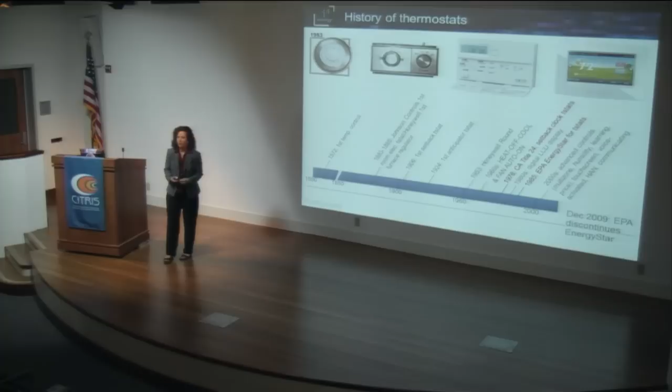So a lot has changed, and I think one of the things we've been very interested in is seeing how this affects energy. About 3 years ago, the EPA discontinued the Energy Star label for thermostats. This was based on research they did, looking at a number of different studies over the past decade to see if these thermostats actually save energy. So I'll show you some of the findings.

They found that programmable thermostats were pretty much being used like manual thermostats were. So if you gave a programmable thermostat to someone who already set back their thermostat manually, well, they were going to program it and use it to do the same thing. But it wasn't magic - it didn't change behavior, and the behavior really was what was driving the setbacks.

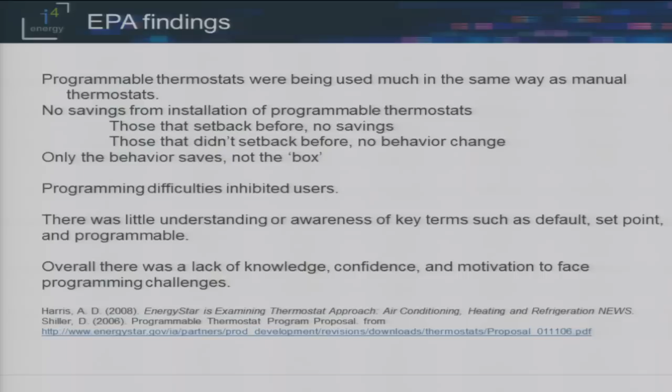They also noted a number of things that had to do with usability - a number of problems with programming. It not only inhibited users so they couldn't program, but they didn't want to program. It wasn't engaging enough to them to even want to interact with it. There's a lot of terms like set point and programmable that people just didn't understand. It wasn't an intuitive use of the word. Overall, you can see people just weren't using it, and they felt it wasn't behavioral reasons - it had to do with the usability of the device itself.

And so that's where Alan Meier came in. He got a grant from the Department of Energy to do a bunch of research in this area. So we started off with a literature review, and we did basically a number of different investigations.

We teamed up with a weatherization crew in the Midwest so that when they went in and actually installed a thermostat, we asked them to take a picture of the thermostat that was there already and to administer a short survey.

Marco Pritoni did this wonderful work with Amazon Mechanical Turk. This was a survey and photo upload - we actually paid people pennies to upload a picture of their thermostat, which was wonderful. We could start looking at cases where people would say, oh yes, I programmed my thermostat, and we would look at the photo and it said it was in hold mode, which basically turns it into a manual thermostat.

This was very informative, and he's got a paper, I think it will be published in the next few months - I think it's in Energy, the journal. We did a traditional online survey, thanks to the Center for the Built Environment across campus. And then we conducted this usability test. Now, Alan Meier talked about this about a year ago in this seminar, so I'm basically going to summarize for you what happened in one slide and then tell you about the work that went on beyond that.

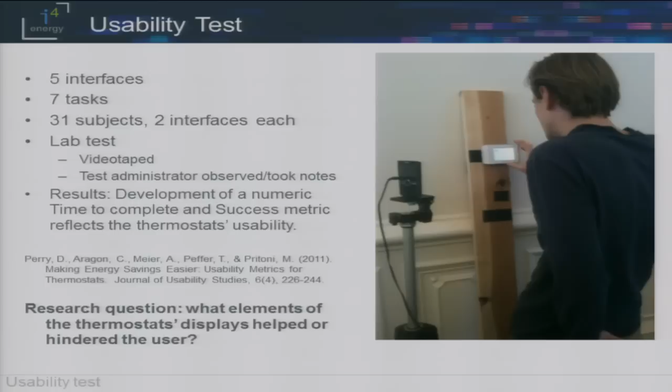So it combined how long it took someone to complete a task with whether they were successful, whether they actually accomplished what the task set out to do. And we were able to use this to reflect the thermostat's usability. A ranking of 0.9 meant it was really usable, and lower rankings meant the thermostat was not as usable.

Daniel wrote a nice paper about this, about a year ago in the Journal of Usability Studies. But my question was, what about these thermostats either helped the usability or hindered it? What helped people perform these tasks, or what prevented them from performing the tasks? So that's really what I'm going to focus on for the next few minutes.

Now this is my caveat. Even though I'm going to be talking about usability, I want to show that usability isn't the whole story with respect to whether people are going to use these programmable thermostats. I think the case of cell phones shows this as well. You could get a cell phone that's not very usable, but because of the utility of it, people want to use their cell phone.

It's going to overcome any barriers to usability. So there's that factor. If people see a high utility, that's going to overcome any problems with usability. Another issue is social acceptability, too.

I think about the Nest thermostat and the people that purchase those. Consumer Reports didn't list them as high in terms of the rankings for usability. But I'm going to bet that if someone goes out and spends the $300 on a Nest thermostat, they're certainly going to use that as a bragging point. It's a beautiful thermostat, something you're going to be proud of on your wall, and you're going to learn how to use it if you see any problems with it. So you have to think about other factors other than usability.

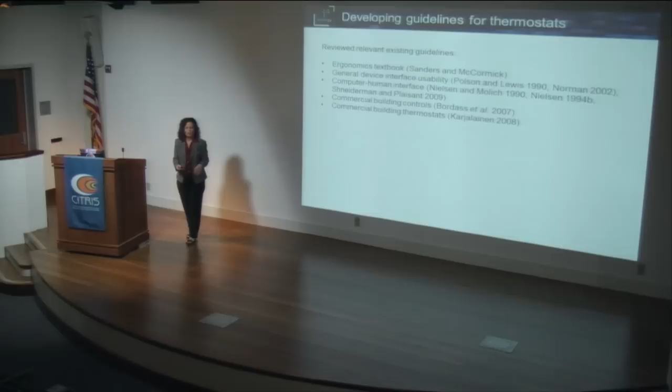Now I'm going to focus on usability. One of the things I started with was looking at what guidelines are out there specifically for programmable thermostats, but also zooming out a little bit and seeing what other guidelines I could use to help guide this analysis.

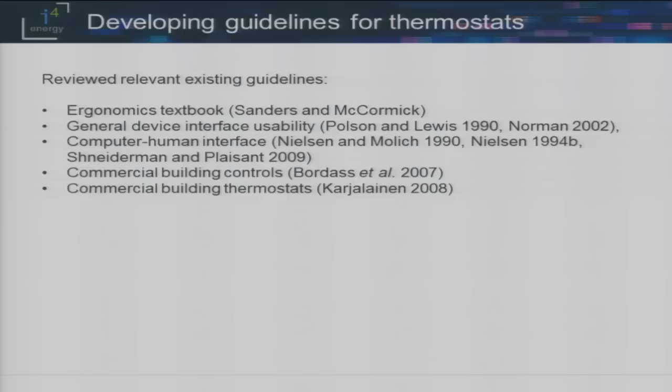So I picked up an ergonomics textbook and just looked at it. It talks about font size and contrast and things like that, dexterity. I looked at general device interface usability, Norman's work—maybe you've heard of him, Donald Norman—computer-human interfaces. Thermostats are really like an embedded device these days; it's really a dedicated computer anymore.

So that was useful to look at. Commercial building controls is another area I looked at, as well as a PhD student in Finland who had done his dissertation on commercial building thermostats and usability of these. That was very useful. You don't have to read through all these, but there was quite a bit of overlap, so one of the things I did was first go through all these different guidelines.

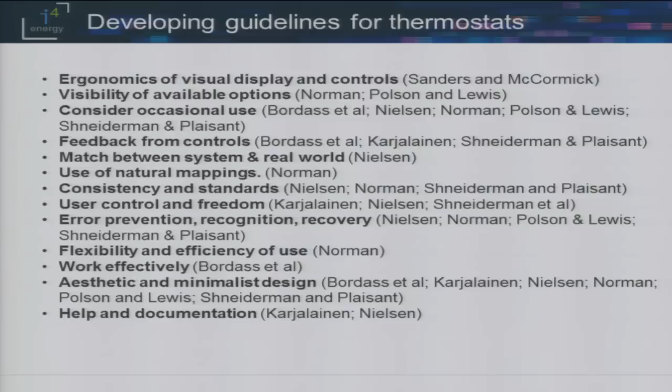I saw where they overlap, like the visibility of available options. Both Norman and Polson and Lewis talk about feedback from controls, match between system and real world, or consistency and standards, error prevention, recovery, aesthetics. Many of them mention minimalist design, and then help and documentation.

Now I'm going to go through the different thermostats. There were five interfaces, and we looked at a pretty broad spectrum, I think, ranging from the simplest one, a simple button thermostat, probably fairly inexpensive, all the way up to a computer web interface.

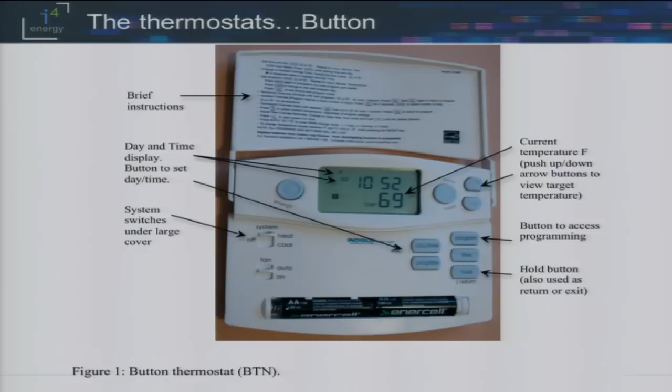With respect to the simplest model here, we called it the button thermostat because you can see this cover here—it comes down and hides this set of buttons. These are the buttons available all the time for the user to look at. So you can see some features you don't use as much, like programming, are kind of hidden away. If you want to just change the temperature, you can do that up here. It also has the instructions there.

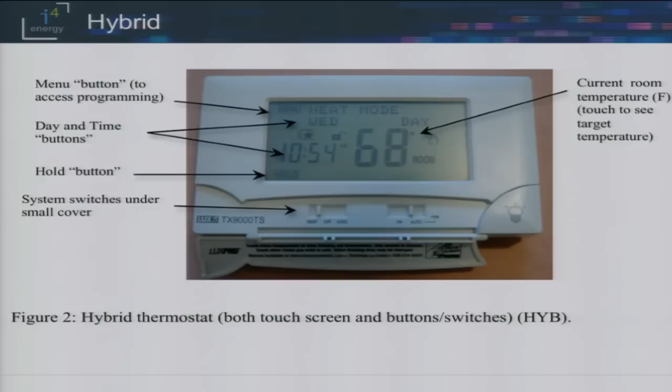This is the next thermostat we use. We call this a hybrid because it had both a touch screen and buttons and switches. In a sense, this might have seemed like a good idea at the time, but in retrospect, people seemed very confused by this. If they saw buttons, they didn't think you could actually touch the screen, or vice versa. So it's like, if you can touch the screen, then why would you have buttons? It led to more confusion than perhaps it was worth.

It also doesn't really look like a touch screen. The size of the screen is just a little bit larger, and I don't think the buttons here obviously jump out at me as something you could push. Actually, this temperature number here, you can actually push that, but it's not obvious that that's an actual button.

You would toggle back between the current temperature and the set point temperature using that. This is a full touchscreen thermostat, Honeywell.

It has actual, I call these switches, kind of virtual switches here in terms of turning on and off the fan or the heat. And then it has a set of buttons here that leads you to other screens that you can scroll through to get other features.

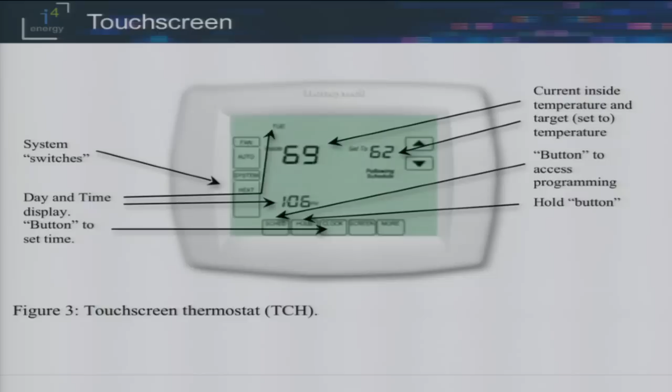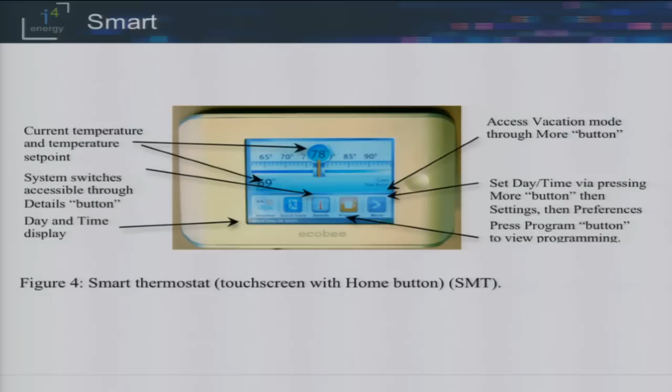Next is an Ecobee. We call this our smart thermostat. It was a connected thermostat, so it actually had a web interface, which is what I'm going to discuss next. This was probably, even though it was a device on the wall, similar to a computer in that these were kind of menu-driven. You pressed a button and you got another. It felt like you were looking at a menu, and it had that kind of look and feel to it.

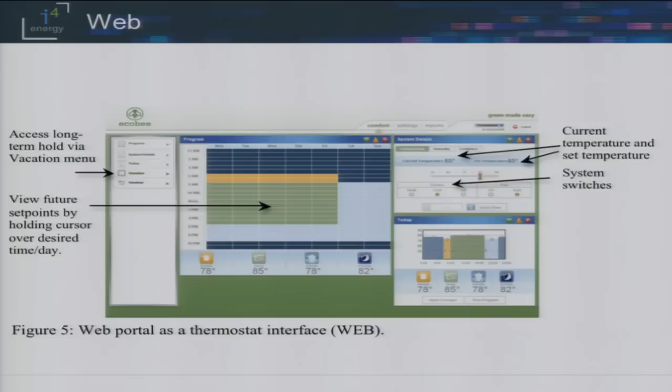This was the web interface for the Ecobee. You can see right off the bat, it has this tabular display that shows the different temperatures based on the time of day and the days of the week. So this is the home screen. You can see your switches there and the current and set point temperatures there.

Now there's a bunch of these graphs, and I'm going to walk you through these a little bit. Basically this shows three things. I'm showing the task, and we thought this was the simplest one. This was basically go up to the thermostat and set it to heat. Don't do anything, just set it to heat. You don't have to set it to any temperature, just turn it on. At the top here shows the percent success.

So there's about 13 people or so per thermostat, and it shows 100% of the people with the web thermostat were able to complete this task. Across this side it has the time, showing how long it took them to do it. I'm showing the completed tasks as well as the incomplete tasks.

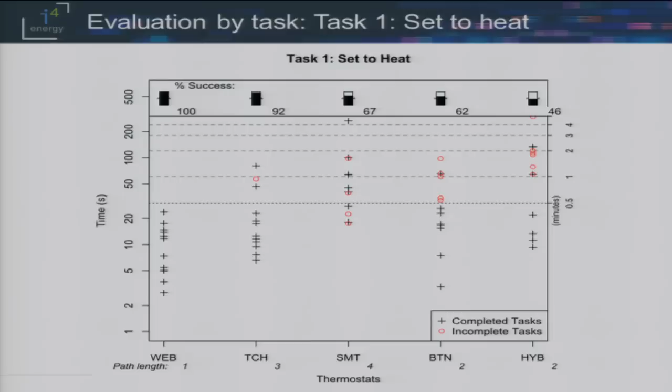Now incomplete task basically means either the person says 'I gave up, I don't know what to do, I'm done,' or they actually did it wrong—they did something and thought they were done, but they actually didn't complete the task. So it includes both of those. You can see there's quite a range here. Of the hybrid thermostat, half of them couldn't even turn it on to heat. So you can see usability is kind of an issue with respect to the simplest, probably one of the cheapest models out there.

Some of the reasons, this is what I was trying to get at: the two with the highest success had the switch—heat, cool, off—visible at the home screen or default level. If you look at the lowest success, the switch was hidden under a cover, and there were actually several people that never figured out there was a cover there. There was no affordance on it, no little arrow or anything that suggested it was a cover.

One thing I forgot to mention here is what I'm calling path length. I don't know if you can see this way down at the bottom, but the idea is how many steps did it take to do the task—whether it was lift up the cover, switch it, so that's 2. You can see the path length here wasn't very long, but the fact that the first step was really difficult was a problem.

So there's 31 people. Each person tested 2 interfaces.

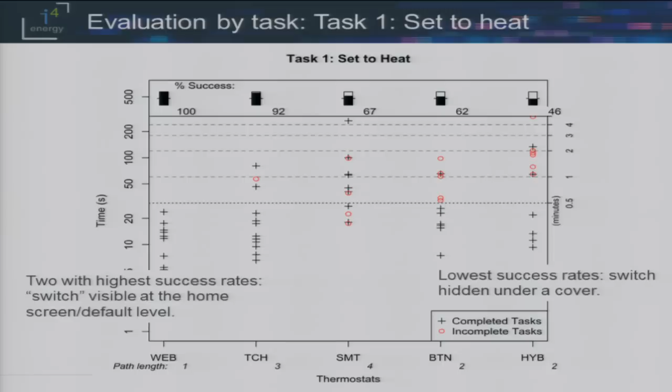You can see that path length was longer here, but still more than half managed to do it. So it was useful to look at all of these things.

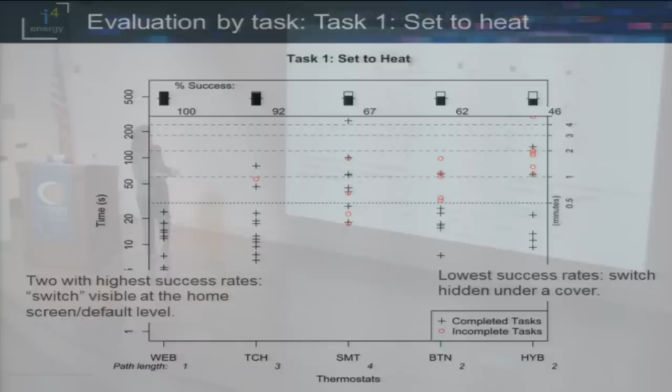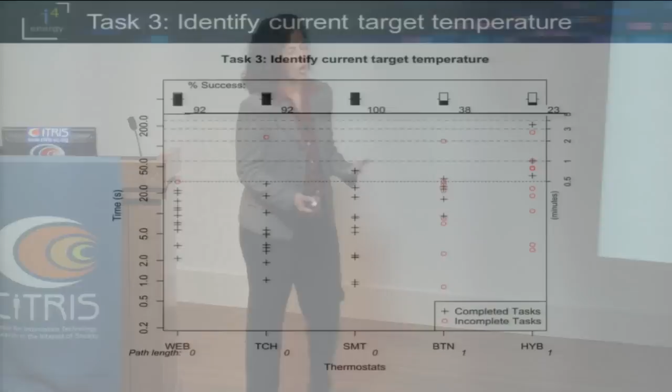Okay, the next task was to identify the current target temperature. So what's the set point right now, right? Not the room temperature, but the set point.

You can see there were basically three thermostats that had both temperatures displayed, so then you got at least a 50-50 chance of guessing which one it is, right? And actually these were labeled, so that even helped more. But some people aren't familiar with the term 'set to' - what does that mean? So you see pretty high success rates with these three.

Yeah, so it showed both temperatures, and the other two didn't have both shown. So with the button thermostat, you had to press up and down on the arrows to actually see what the set point temperature is.

And with the hybrid, you had to press the screen where the current temperature is, and it would toggle to see the set point temperature. Completely non-obvious, so just a few people got that. You can see how long this one person took - over 3.5 minutes to figure that out.

Do you have an audio recording, and were there things that you had to bleep out?

Yeah, actually, yes. The researcher, Daniel Perry, who recorded all this, did an incredible analysis where he went through every single video and tallied what people did and their comments as well. He had like a little column - it wasn't the expletive column, but it was something similar. When people expressed frustration, he actually counted that.

Pretty neat. These people did the tasks in sequence? They did. So at some point, they probably figured out how to open the cover - some people did and some people did not, for all seven tasks. So there was some kind of learning as you go through, but not in all cases.

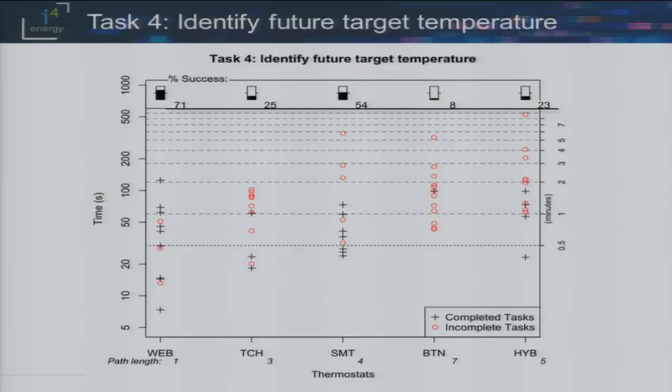As I mentioned, the web had the schedule right on the home screen. You had to mouse over it, and then the temperature number would pop up, and you could see what it was. But it was right there on the home screen, so I think that's why we got a pretty good success rate.

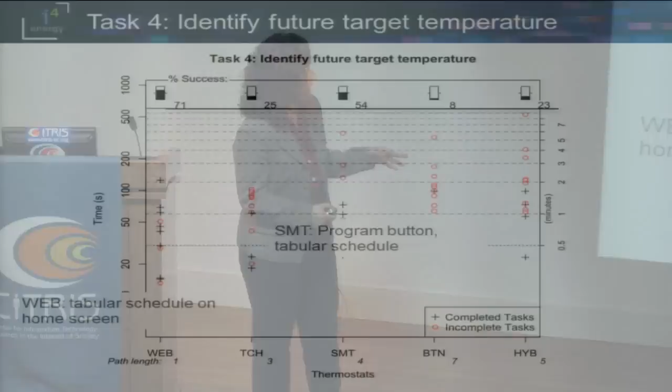The smart thermostat had a program button and a tabular schedule, so that was good. I think it's much easier to read when you have time of day and days of the week in a graphic format.

The touchscreen, it was called a Schedule button. And I've seen on different thermostats, it'll say 'prog' for program. So part of it, too, is the nomenclature - people may not be familiar with these terms and may not understand what term gets them to where they want to be.

And the hybrid thermostat, if you press on menu and then scroll, and then you could select it, and then next - so it was, again, a series of operations to get this. You had to actually go through each mode to find out the day and the time that you wanted.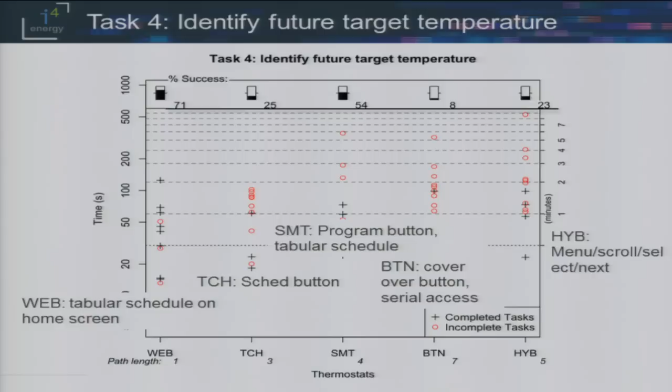And the button was - one person got it after 1.5 minutes. They probably have one of these at home or something. It was serial access, so you had to go through, again, every single time. At least the hybrid allowed you to skip a day, but this one, you had to go through every single one - it was serial access to it.

And again, the cover was over the button, so if you didn't get that the button was under there, you were lost already.

Okay, the final task was to set it for away or vacation. You can imagine with a programmable thermostat, one of the energy saving features would be to turn it off when you're gone, right? To basically turn it down. And you can see the success rates here.

Three of them had a specific button that said vacation, away, or energy savings, in addition to a hold mode. There were a few different ways people could accomplish this task: they could go to a specific strategy like vacation mode or away mode, or they could just put the thermostat in hold.

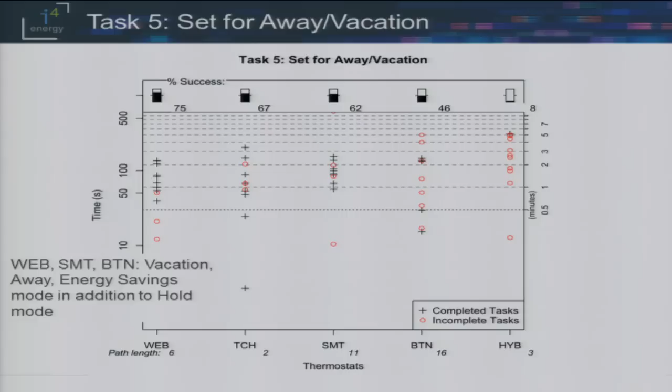Some people got so frustrated, that's why you see times of 5 minutes up here. Look at that guy, 10 minutes trying to figure this out and unsuccessful. People would go through and actually program for every single time of day and every day of the week. A couple people did that as their strategy.

So you can imagine if you're walking out the door on a vacation, with all the things you've got going on, you're not going to go over to your thermostat and try to figure out how to put it in vacation mode, right?

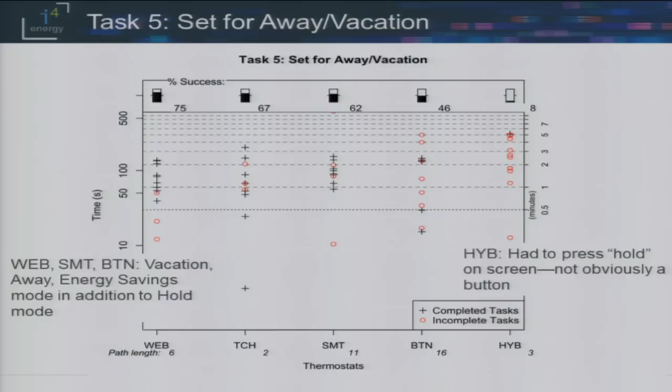In the hybrid, you had to actually press hold on the screen. I don't think it's obviously a button. One person got it after 5 minutes, probably random too. You should see these videos, they're incredible. People are just touching it and doing anything they can to try to get it to respond.

Things that seemed to be important were visibility of available options, consistency in standards, and feedback - those were kind of the three main things. One of the things I looked at too, from the existing guidelines, we pulled these out as some of the more important ones. Terminology was also a big thing.

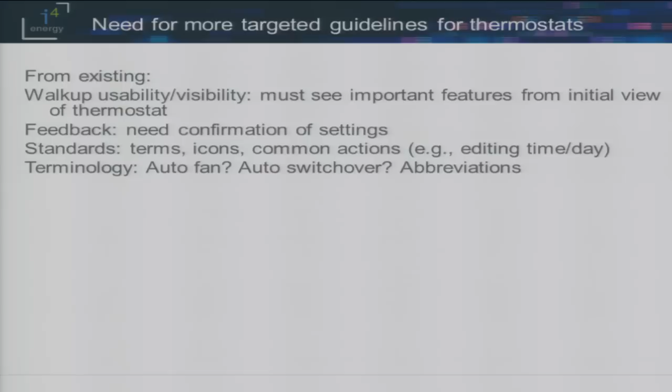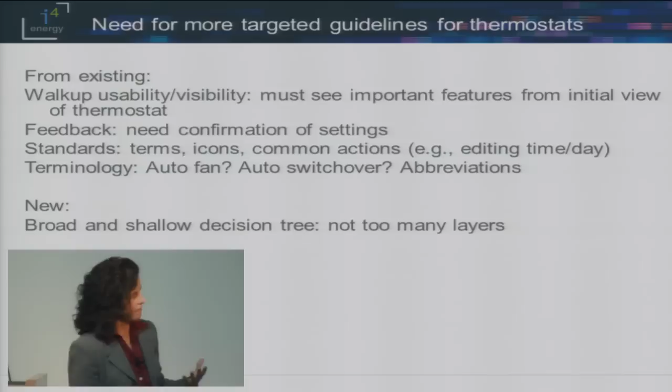But it also seemed to me that there were some guidelines that were missing. I mean, obviously I didn't look at every single guideline there is, but I did try to cover the bases. So one of the things I thought would be good, if I'm creating a new set of guidelines for programmable thermostats, is having a broad and shallow decision tree.

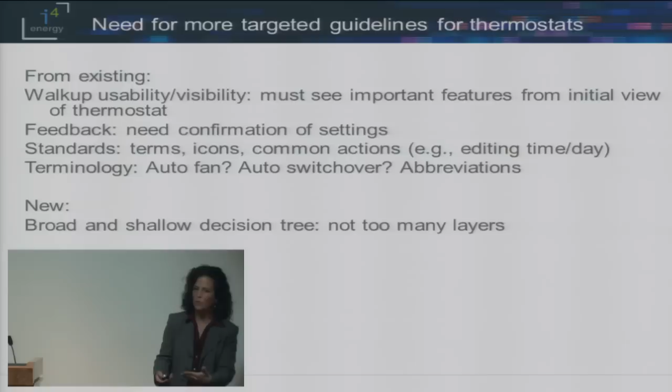The idea here is that you have most of your choices at the home screen, very visible, and you don't go too deep. You don't have 10 layers, because at every decision point is a place where people can get lost. So the idea is to try to build this decision tree as broad and as shallow as you can, so that people don't get lost, and you can increase your chances that they'll actually accomplish the task.

This is not new - I went back and actually found a reference to this under Shneiderman. In 1988, he came up with this idea or something very similar.

Hierarchy of display. Often with these thermostats, you see the display for the set temperature and the current temperature neck and neck, the same size, where actually you would probably look at the current temperature more often. So it's nice to have more of a hierarchy so that the important features really jump out at you, and the other ones kind of fade away in the background.

Affordances - switches should look like switches, covers should look like covers. There should be some affordance or marking on there that shows that you should push this or open this. And navigation, this was a big problem.

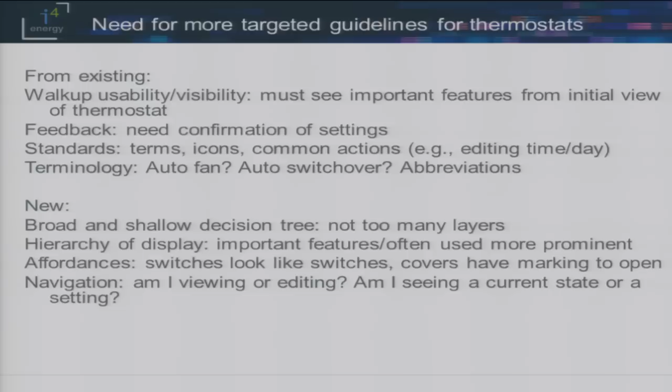People often didn't know whether they were editing or viewing, as I was talking about with the program. So three thermostats had an ability to look at the schedule, just view it. The other two, you had to go into edit mode just to look at it, okay?

And that's rife with potential problems - if you think you're just looking at it and you hit something, it gets saved, and all of a sudden you're heating to 78. So big problem. A lot of people, even just with switching it to heat, didn't know whether they were saying the heater's on right now, whether this is a current state of the system, or whether they were viewing a current state versus actually setting the system.

Recovery from errors would be a big help too. So we had very specific recommendations, and some have been mentioned - covers should, I would consider no covers. I have a thermostat at home where someone took off the cover and left it there, and I wouldn't have noticed. It didn't make any difference to me.

The graphical or tabular form to look at the temperature set points seemed to really work for people, so I think that would be good to include in future designs of programmable thermostats. Use confirmation prompts - often people would do what the task required but then not save, and there was no prompt asking if they were sure they wanted to leave before saving. That would have been a huge help. And use plain English whenever possible - there were things like span, sked, and prog that are just nonsense words.

Networked systems - in multi-residential applications, this allows one manager to access and change a bunch of settings. Very positive. In a single residential dwelling, you can have your smartphone interface with your system, or control it through the web, especially for programming. This might eliminate some problems. I just looked at a few different thermostats, mostly just to get a sense of what was out there.

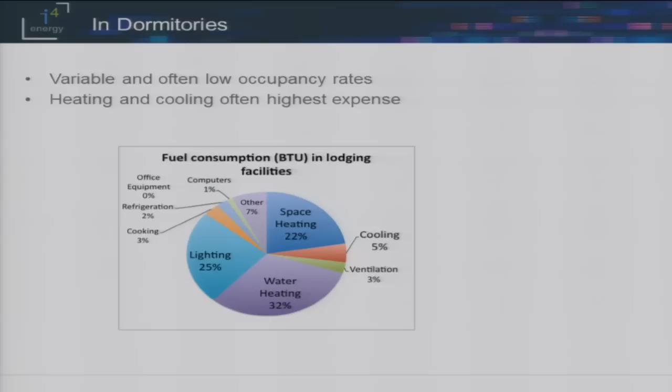In terms of looking at the speed program, we thought a dormitory seems like a natural fit - the occupancy is variable and often very low, for weekends or vacations, and the heating and cooling is often the highest expense. So it seemed like a good place to do some energy savings.

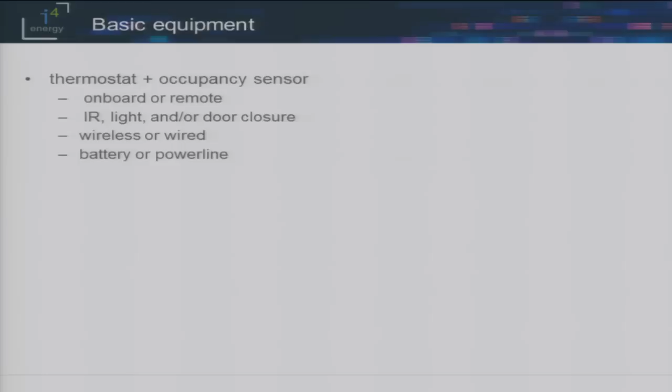Basic equipment was a thermostat and an occupancy sensor - this could be either onboard, with some of the simplest and cheapest just having an onboard sensor, or remote, where you have something you can stick to the wall or ceiling. The way occupants are sensed is either through infrared or through light. This is especially important to distinguish nighttime versus unoccupied time - you want the thermostat to know the difference between those two.

And one thermostat company deals a lot with door closures - it senses a door closure and then looks for occupancy before or after that period. Wireless versus wired, you still see both, and battery versus power line for the sensors and for the thermostats.

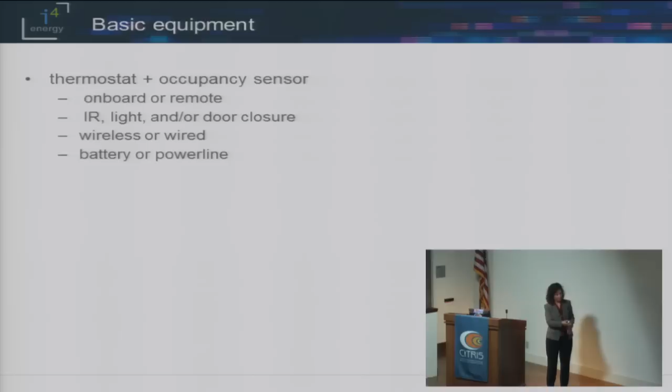In terms of the different control options, obviously when occupancy is not detected, you want to turn down the heating or cooling, right? Not have it cycle as much to be able to save energy.

There's some interesting things that Telkonet is doing with these learned recovery times. The idea here is you're measuring how long it takes for the temperature to recover, so then it decides how low to let the temperature go. This happens continually. So you might have a situation where in the wintertime the sun is low, and this one room is getting blasted with heat. That's a situation where it looks at how quickly it will take that room to recover.

The idea was within a 10-minute period, as a lot of the folks at UC Davis set, the temperature could come back up to speed. So 10 minutes after an occupant walks into the room, the temperature is reset back to their comfort level. The folks at New York University said this was pretty key in being accepted by the occupants.

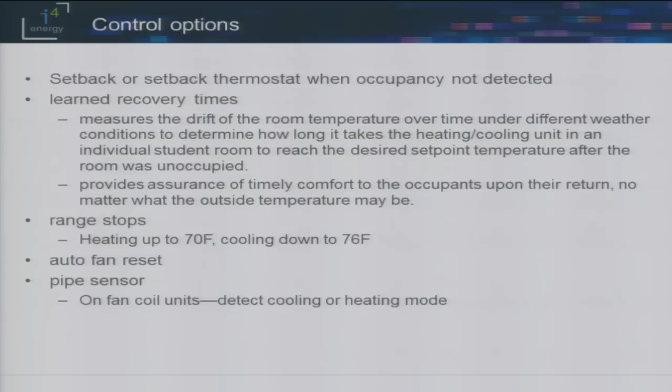Range stops basically prevent the occupant from setting the thermostat however they want. So typically you stop the heating at 70 degrees or the cooling down to say 74 or 76. I'll talk about this a little bit later, but in some of the dormitories on the East Coast that I looked at, they were heating to 78 and cooling to 65. So you can imagine just putting in range stops saved a lot of energy.

So, and other things like auto fan reset and pipe sensor. There's different control options here.

And then network - a couple different ways I've seen the network. Of course, they don't need to be networked, and that's another option, but the network does provide value. This is the Telkonet system where you take the thermostats and you have these gateway servers, and then they gang up to this data center, and the facilities manager can actually go online and take a look at all the thermostats and whether a room is occupied or not.

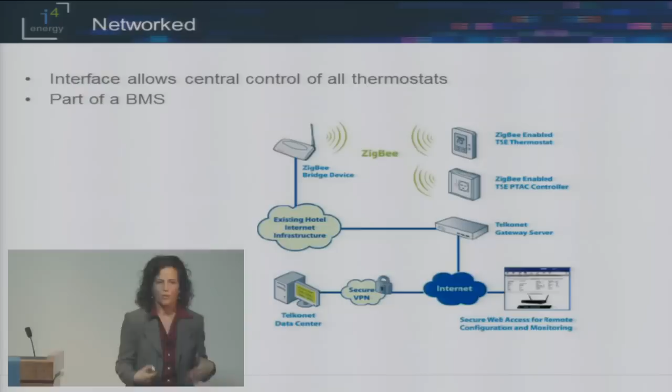Another way that they're used is part of a BMS, so it's actually more of a centralized control. It depends on how the HVAC equipment typically is set up.

So I looked at 4 different installations. The one at UC Davis was really just getting underway as the study went on, so there wasn't as much information. So I went back and looked at Harvard Law School, installed a number of years ago, using an INNCOM system, non-networked. And then New York University.

New York University is doing a lot with respect to sustainability. They started off with 1,500 thermostats, and I think they've got over 4,000 now. I'll talk a little bit later about this range in terms of the return on investment, the savings. Basically, the first ones they installed were the very first ones that Telkonet installed in any dorms, and there was a huge learning curve.

There were a lot of callbacks. There were a lot of problems. I'll talk about that in a minute. But the later installations had a shorter payback period.

So to talk about the energy savings, it's really dependent on a number of things. Obviously, the existing runtime makes a big difference, so colder climates actually are going to have more savings than mild climates. In fact, the manufacturer from INNCOM told me that there are places in California he probably wouldn't install this technology - it's just the climate is too mild. Santa Barbara, for example. Building insulation, obviously, if it's poorly insulated, it's going to use more energy.

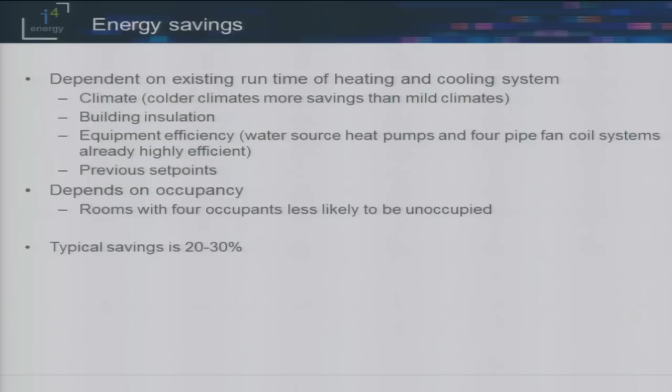Equipment efficiency - again, the same guy at INNCOM said to me there's some systems he probably wouldn't install. If it's a high efficiency fan coil system, probably wouldn't install the system. The system is already fairly efficient, so you're just not going to see payback periods of less than 5 years.

And then previous set points - I mentioned this with New York University. The project manager was telling me she was seeing students dressed in t-shirts and shorts in the middle of winter where it was freezing outside. So it was kind of a clue that they were really overheating their rooms. And it also depends on the occupancy - dorm rooms come in different sizes, right? So you see some single occupancy rooms, much more likely to be unoccupied.

Once you get to 2 people, 3 people, 4 people, 5 people, you're going to get fewer instances of unoccupied rooms, so the technology won't do as much. But even with that, typical savings I'm seeing in these different projects is between 20 to 30%, which is nice.

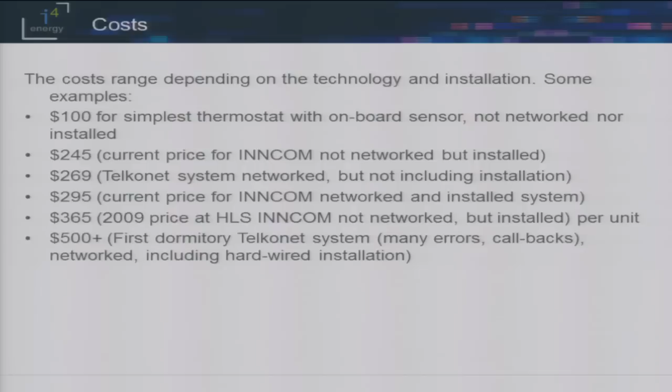In terms of lessons learned, communication was pretty critical. Engaging students was a big part of it, as was letting the maintenance people know what was happening. This is a tool they could use, especially if networked, for diagnostics.

Location of the occupancy sensor was another issue. One problem with the first Telkonet systems is that they installed them on walls, and students moved furniture in front of the sensors. I think they installed a couple where the sensors were actually viewing warm currents from the return, which was a problem as well.

Not understanding the heating and cooling system was another issue. At UC Davis, there were 5 rooms served by a single fan coil unit with existing thermostats, so they replaced them with Telkonet thermostats. But what they didn't know, and found out later when they saw no savings, was that the BMS system was using the temperature in the hallways to control the system. So people were cranking their thermostats right, left, and center and not getting anything. Part of it was that they just didn't fully vet the system before installing it.

What's remarkable is that at UC Davis, the facilities managers, even though they saw no savings, continued to install the occupancy sensing thermostats in other dormitories because they loved the networkability. They loved that communication, being able to, when vacation starts, take all the thermostats and turn them off or down. They valued that so much that they went ahead and continued installing them.

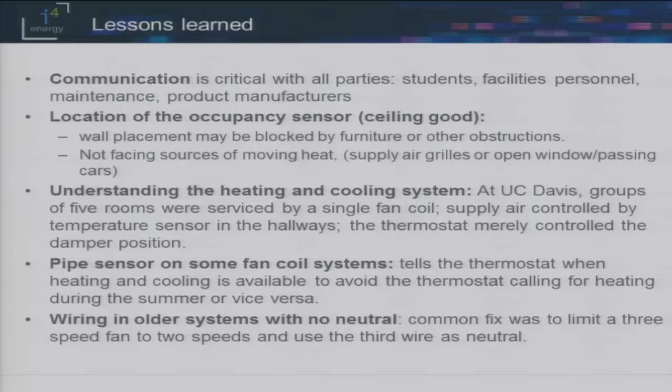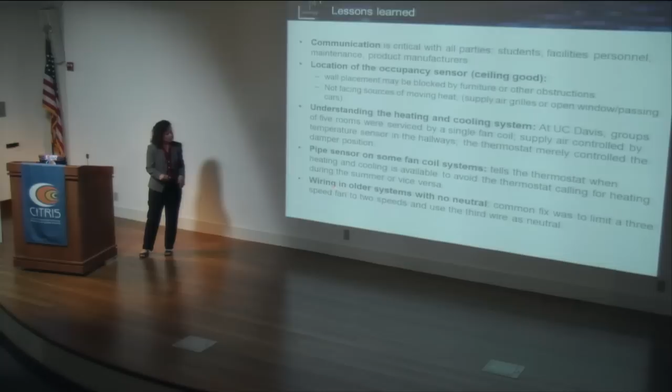The guy at Harvard said to me, if we were thinking about this again, we would have used some sort of pipe sensor so that the thermostat isn't calling for heating in the middle of summer or something like that. Another issue at Harvard was older systems with no neutral wire. They basically took a 3-speed fan and turned it into 2 speeds, using the middle for the neutral. Not a big deal, but something to note.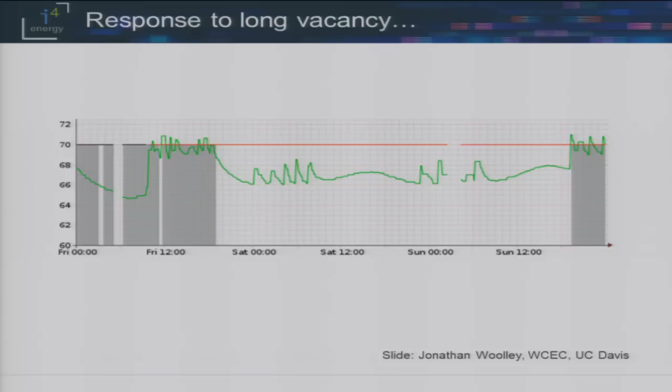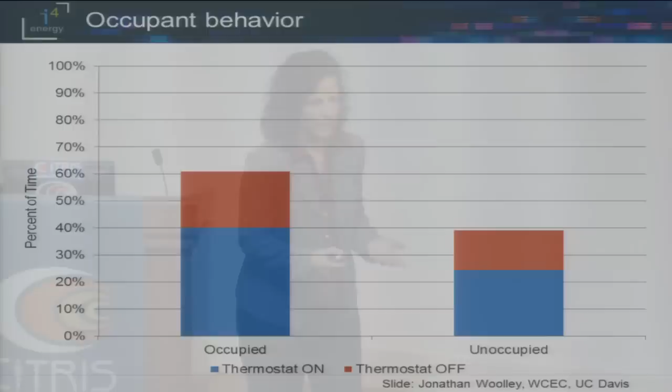Just a note about occupant behavior. One of the things New York University really tried to do is engage students, letting them know how the system worked. This is from Davis, but it was remarkable how many students would actually leave the thermostat off when they were in their room, and some would just turn it off when they left. Really great behavior.

Telkonet, we talked to them about this in terms of our analysis. We said we really want to see the difference between whether the thermostat is saving the energy or the student turning it off is saving the energy. That's a big deal for us, and we want to be able to report on that. So they changed the interface so we can now analyze that, distinguishing between when the student turned it off versus when the system itself was turning the temperature down when it was unoccupied.

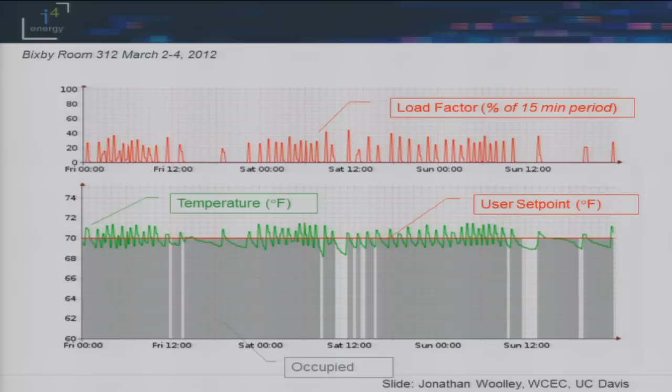So this is again that one room, just looking at the load factor. This is the room where there are very low periods of unoccupancy, and you can see the load factor is still pretty high. Then you can see the correlation between when the system is active and much less runtime on the equipment here.

This is comparing the two together. One of the issues with Davis is that they just installed the sub-meters within the last month or two, so we've seen differences. We've seen a reduction of chilled water use, but we don't have a number on how much it's saving the university yet. We should have that in the next few months, an actual number of how much money we're saving, as opposed to just the reduction of load or these visuals showing the system seems to be working.

So just to summarize, I'm trying to make the point that usability is not the only factor with respect to the adoption and use of these programmable thermostats, but we certainly think that guidelines and better usability will improve the chances that people will actually engage with and use their thermostats to save energy.

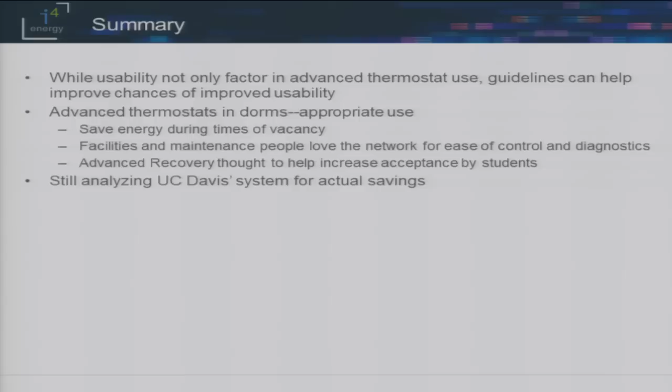The conclusion on the second project was that advanced thermostats in dorms seem to be an appropriate use. They save energy during times of vacancy, and the facilities and maintenance people really enjoy it.

The guy from Harvard told me that what they used to do is have someone go into each room during vacation and change the temperature set point. So having the ability to just change them all at once was really a big help to them.

And the guy at New York thought that the advanced recovery increased acceptance by the students. If the student knew that once they walked into the room, within 10 minutes the temperature would be at comfort level, that helped them accept this technology.

So I mentioned that we're still analyzing the UC Davis system. That's it, thank you very much. I'm happy to take your questions.

I have a question, I have to go back to one of the slides, just to help me understand it. During that vacant period, you can see the temperature oscillates a little bit during some periods. I'm just curious what's going on there - I'm guessing there was a hard stop at 66, and if you look, this is the same one, it's actually showing the system going on to cause these spikes.

I was curious about that too - it's mandated by your tolerance for how long it can take to heat back up once the occupant re-enters. If you say it has to come back within 10 minutes to the comfort level, you can't let it drop below a threshold. So it's caused by trying to make sure it gets back to that recovery within the 10 minutes or whatever. So if you relax the 10-minute constraint, presumably it would allow the room to cool below 66.

There's potential for this to be even smarter, in terms of if the room isn't occupied, maybe doing some probabilities - if the room is not occupied for a day, maybe the second day the probability increases and you slowly ramp it down. But they're still very interested in trying to keep within this 10-minute range, at least initially, and maybe they can stretch that in future iterations.

Okay, I think that's all. Jenny, your answer doesn't totally make sense - I'm just lost on one thing. On Friday before noon, you see that it does go to like 65. What's going on there? And if you look, the thermostat is off - is this what you're talking about? The thermostat is off here.

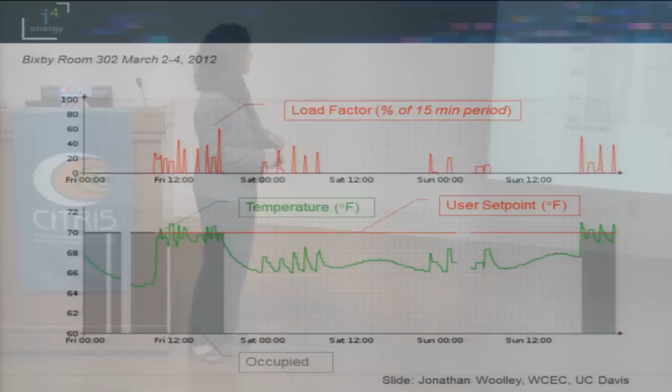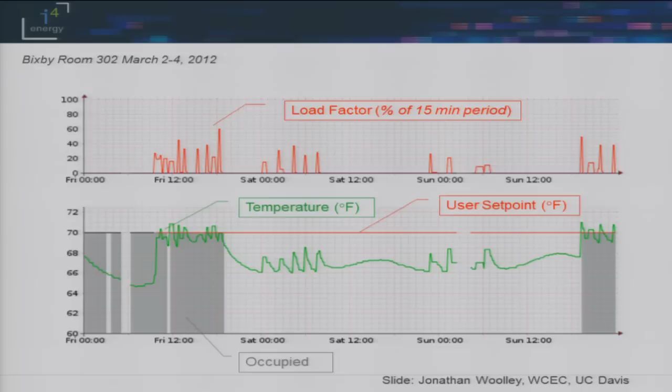It's off for a while, but then even when it's on, the temperature does drop down to 65 and stays. And then it's on, so this is the Telkonet occupancy sensor saying the room is not occupied, I'm going to drop the temperature down. It's not easy to see the distinction - this black line here is showing that the thermostat was actually turned off, and then the rest of it is turned on. I should have labeled that better.

Does this smart thermostat figure the time constant for the 10-minute recovery from previous examples? I think that's how it works - remember we had this big difference in the time constant when the thing was going down versus coming on with the air being circulated. I'm not exactly sure, it's a patented technology, but other thermostat manufacturers have used something similar where they try to learn by looking at the outside temperature and other conditions, trying to see how long it takes in these conditions to return to temperature, and that's how it decides what temperature to go to. I don't know for sure how it's figuring that out, though.